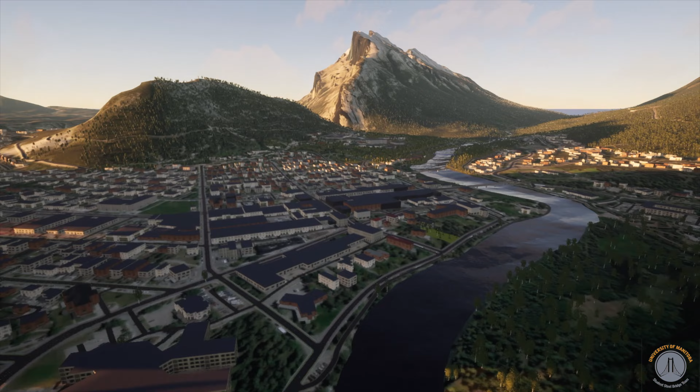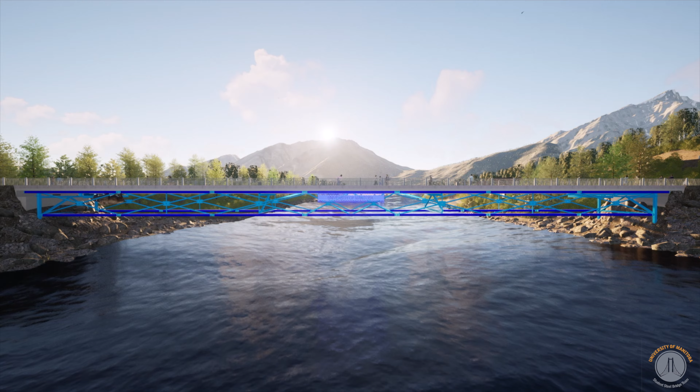One such example is Banff, Alberta. Known for its natural beauty and home to the oldest national park in Canada, it is also home to a rapidly growing tourism industry. In recent years, they have seen a massive increase in pedestrian, cyclist, and automobile traffic. This in turn has overwhelmed the only 3 bridges across the Bow River. This has created a dangerous situation for travelers, but also is limiting access to the south side of the river. As such, the town of Banff has proposed a new steel bridge for pedestrians to provide more opportunities for visitors and residents alike to access and enjoy the attractions and trails on the other side of the river.

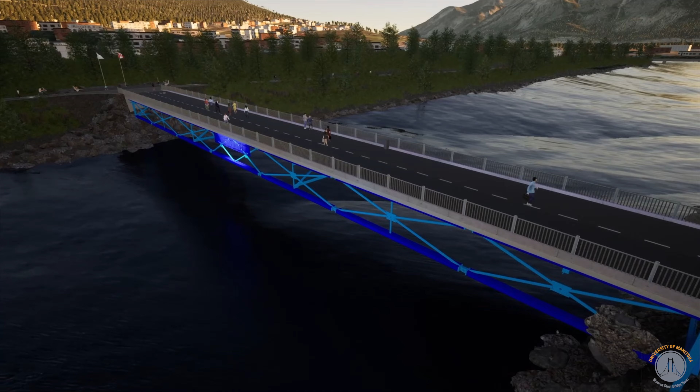Where ingenuity and creativity combine into a passion of working with steel, we are a group of 40 members with 4 team advisors at the center of Canada. We are the University of Manitoba Steel Bridge Design Team. Today we will be presenting to you the scale model of our pedestrian bridge design for the Bow River located in Banff, Alberta.

Before we begin, we'd like to acknowledge that our team is located on Treaty 1 territory, traditional lands of the Anishinaabe, Cree, Oji-Cree, Dakota, Dene, and homeland of the Métis Nation. We acknowledge the treaties that were made on these territories. We acknowledge the harms and mistakes of the past, and we dedicate ourselves to move forward in partnership with Indigenous communities in a spirit of reconciliation and collaboration.

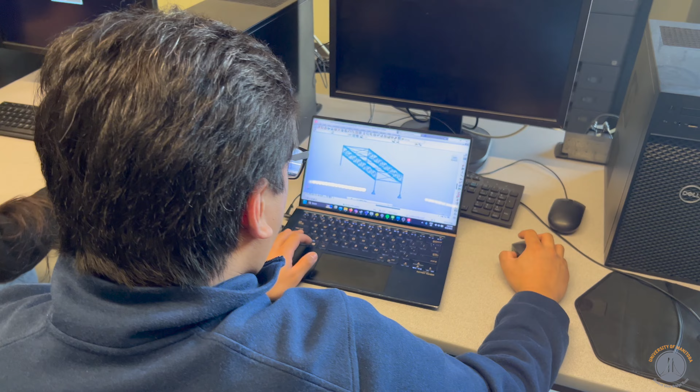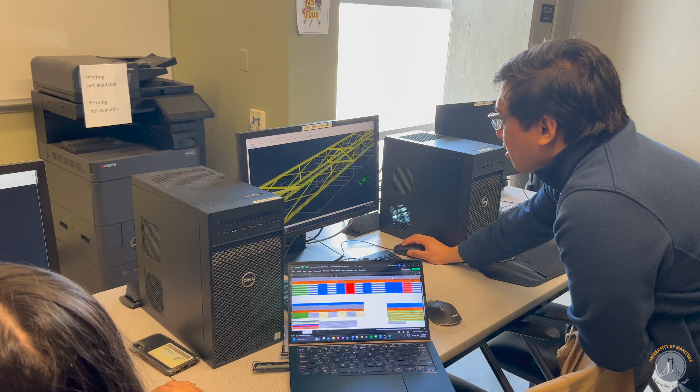At the beginning of our design process, we divided our team into sub-teams. These sub-teams not only allowed us to work efficiently, but were integral to the development of our project. Each sub-team used SAP 2000 and hand calculations to develop their own design. Using these, the sub-teams each made different solutions. This diversity allowed us to explore multiple designs. The team followed the Canadian Steel Design Handbook for our designs. We modified the parameters found in the handbook to reflect any reduced uncertainties to create the most optimized design possible.

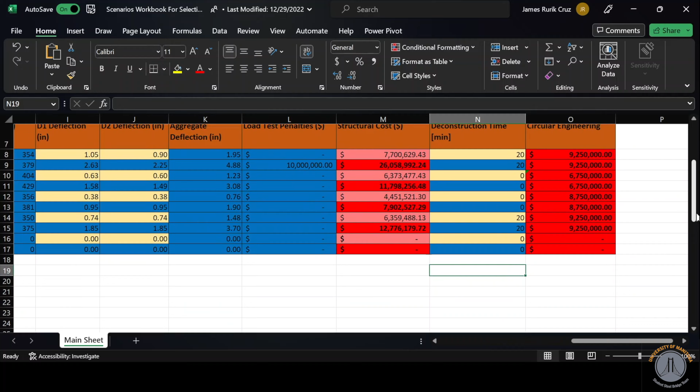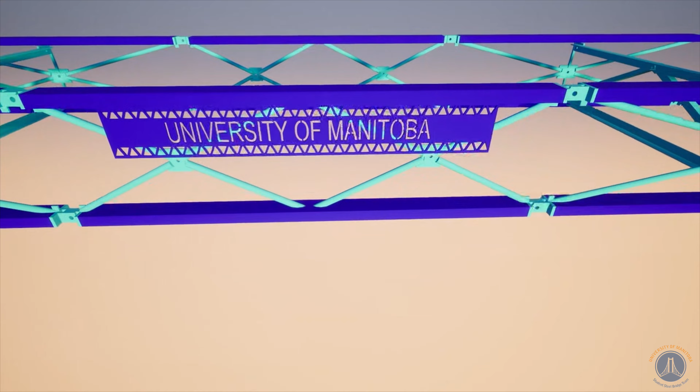We then made an evaluation matrix based on the rulebook. This allowed us to estimate the scores of each sub-team's designs against the different categories. We found the best scoring design out of all the sub-teams and used that for our final design. This design features a truss design with top and bottom chords. Further, this design used cantilevered ends to maintain a proper stringer length while minimizing the span. This allows us to satisfy the minimum stringer length template while also reducing overall weight and deflection.

Additionally, the stringer thickness starts off thinner at the footings but becomes thicker in the middle. This is an optimization of the design where we take away steel from where it is least needed into where it is most needed. Doing this also allows the outside dimensions to stay the same for aesthetics. Lastly, we designed the connections to reduce faying surfaces and the number of bolts.

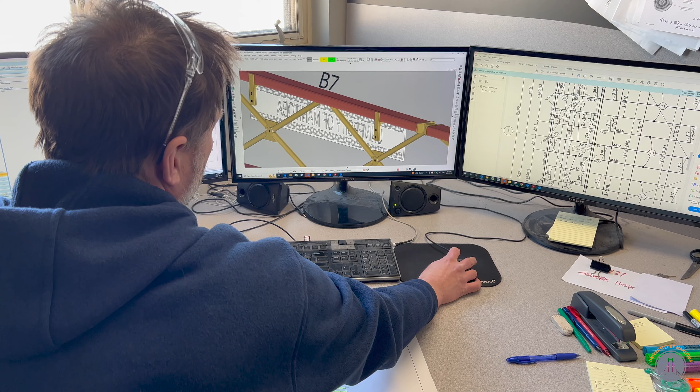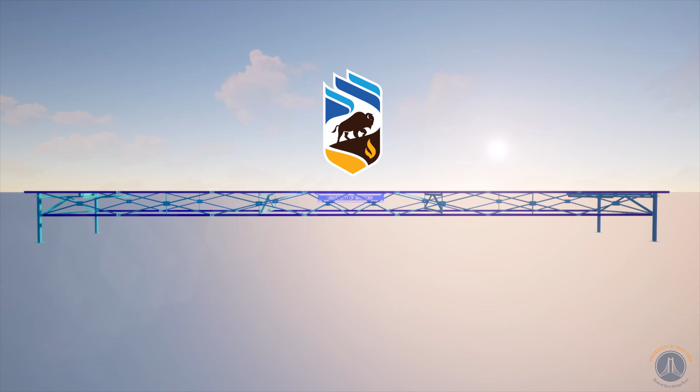Banff is known for its beauty, both natural and built. Therefore, we felt our bridge should add to that beauty, while also reflecting our school spirit. We chose to paint our bridge dark and light blue, colors that were inspired by the University of Manitoba logo. These colors represent both the sky and the northern lights, evoking the ideas of learning, knowledge, and progress. The aesthetics of our design are not just for show, as making something look good, as well as work well, makes it so that our design can be integrated better into the community that it serves.

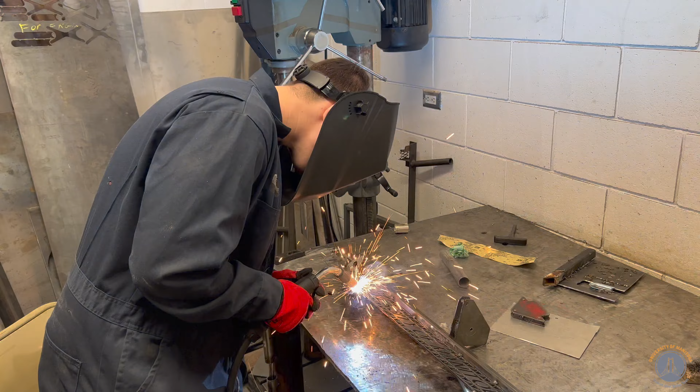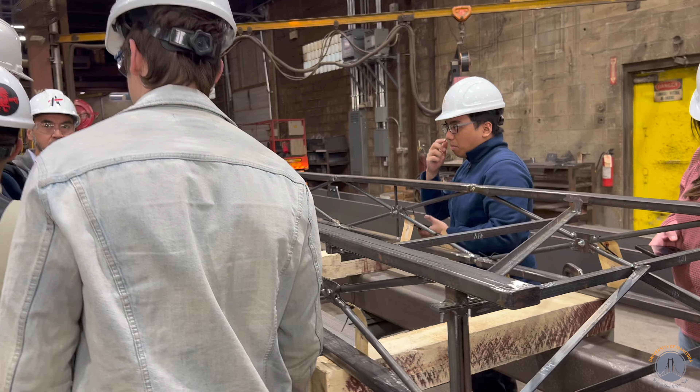Often the greatest challenge for any project is the transition from ideas into a physical design. To overcome this challenge, our team looked for local fabricators and experts, where we found Besco Limited. Using modern practices such as plasma and laser cutting, as well as by working closely with their in-house experts, we were able to bring our design into the real world.

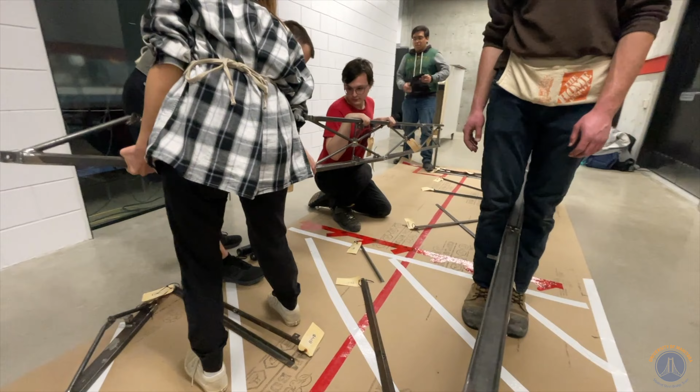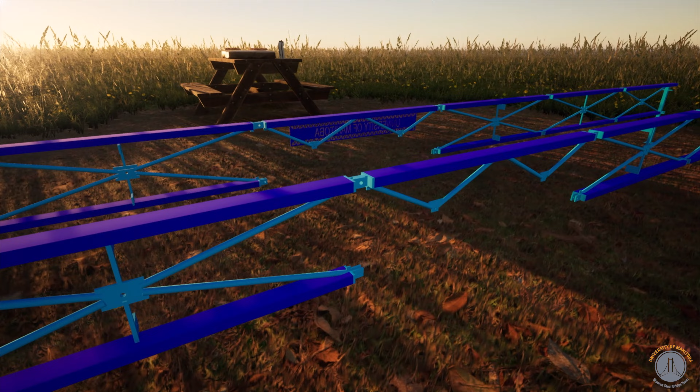And now let's talk about the construction process. To start the construction process, we begin by placing the piers in the footing areas. Then the lateral bracings are attached between the piers on each side of the bridge. Stringer members are then attached one by one from both sides. 2 halves of the stringer are connected in the middle. After completing one stringer, the team will move on to the other stringer. After the completion of both stringers, the lateral members are attached. The deconstruction process occurs in the opposite order.

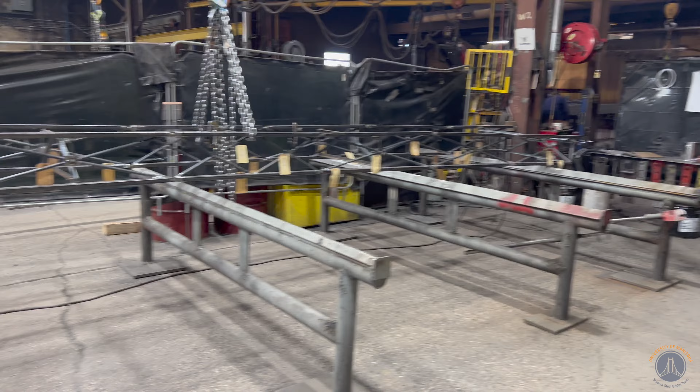This year we decided to assemble the bridge with only 4 builders to reduce our construction costs. 2 other team members will be spotters and verbally assist the construction team by pointing out potential violations and reminding them of the correct building procedure.

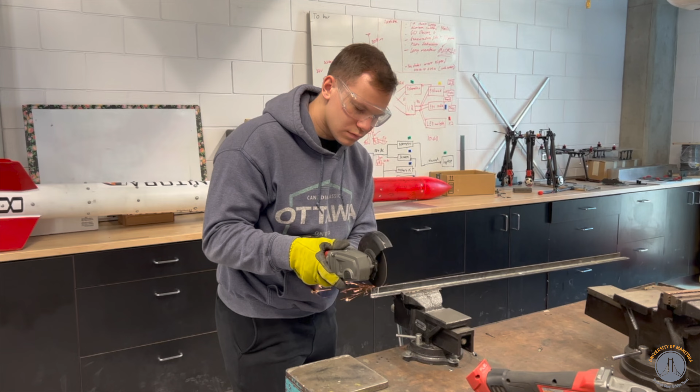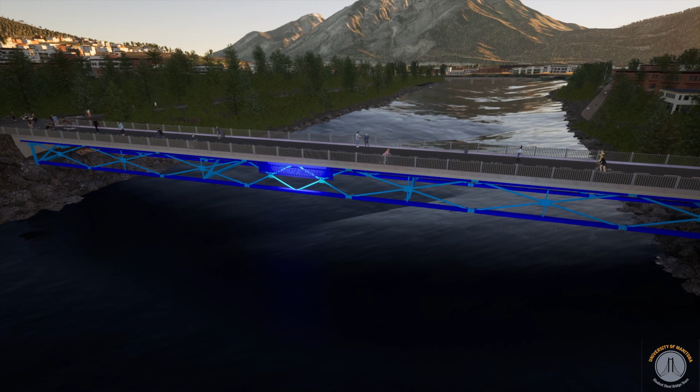Over the last year of development, our team has encountered many hurdles. However, with teamwork and ingenuity, we have been able to overcome those hurdles and accomplish our goal, creating a model bridge with a dual-chord truss-like design with an estimated cost of $10.6 million. Ultimately, this allows our design to fulfill the need of a community, allowing for safe and convenient travel to Canada's greatest natural wonders. Our design allows for more people to enjoy this wonderful land and gives room for a community to continue to grow and flourish. For what is a bridge but something that brings us together?